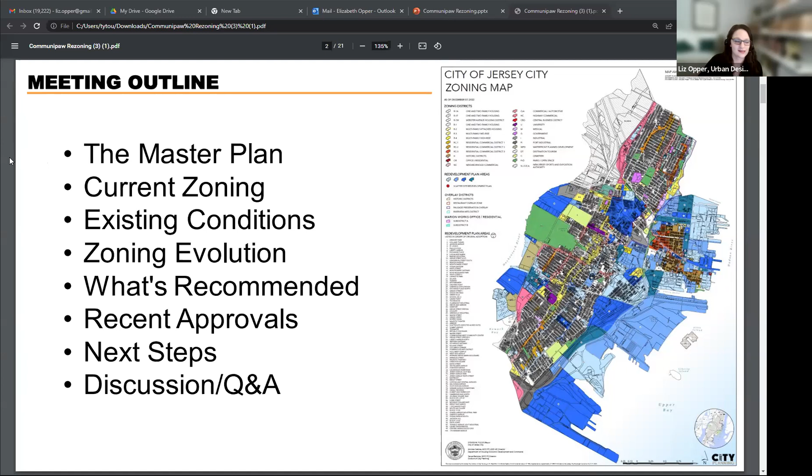So we recently adopted an update to our master plan. The land use element was one of the elements updated in this effort, which provided many zoning recommendations. City planning is studying these recommendations and will be bringing them to the planning board in different groups or phases. Phase 1 was focused on corrective zoning. You may have attended some of those previous meetings, and the efforts of phase 1 were adopted in September 2022.

Something you might be familiar with, as there's an RC1 on Mallory Ave, was looking at some of these RC districts. Phase 2 of our effort, which is what we're doing now, will focus on recommendations to the R1 and other low-rise residential zones. So right now we're in phase 2 of our efforts with the master plan.

A master plan is made up of many elements. I've already mentioned the land use element. Other elements include open space, housing, circulation, and others. Each of these elements had their own recommendations. As part of our recent update, we reviewed all of the master plan elements and identified common goals between the elements. Those goals were then framed as lenses: connectivity and mobility, economic opportunity, social equity, and climate resiliency, allowing the master plan vision document to synthesize overarching goals and recommendations and put something more cohesive and clear forward. So all of these things are connected and tied together and shape each other.

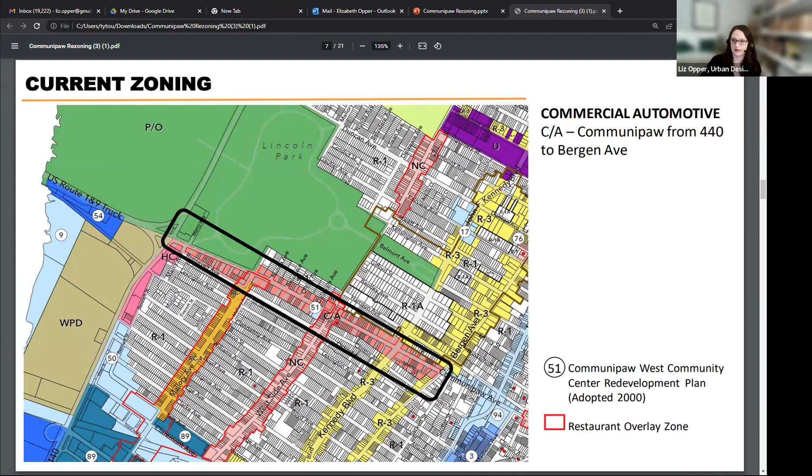Today we're specifically focusing on the area of Communipaw between Mallory and Bergen Avenue. We're recommending that we look at this area for rezoning, and that the western portion from 440 to Mallory Avenue would be better suited for redevelopment. There's a majority landowner there. There are other small home property owners as well, but it is one majority owner.

This way we can look at the lot at the block as a comprehensive vision. These lots are also through lots, meaning they have 2 front yards. And the lot depths are not typical—a lot of those lot depths are less than 100. So the conversation today is going to focus on Communipaw Avenue between Mallory and Bergen.

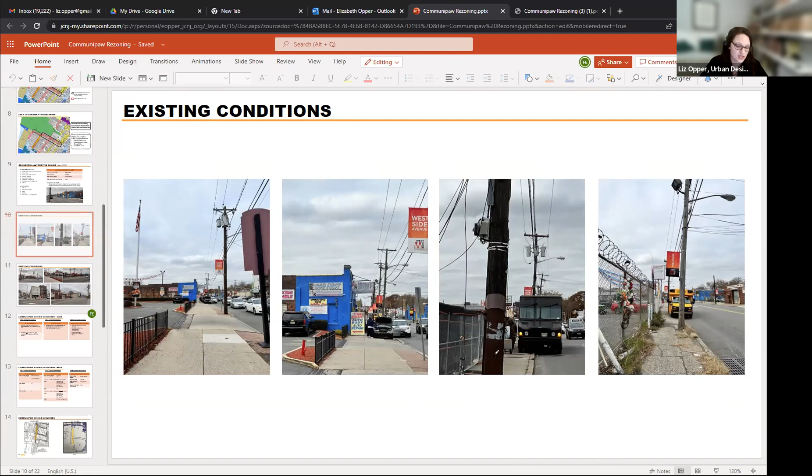There are a lot of vehicles that mount the sidewalks, some of which are there for extended periods of time while they're being serviced. It can be difficult and unpleasant to walk here, and given the proximity to the park and Westside Avenue shopping, this area should be much more walkable.

Just wanted to share some additional images highlighting the various uses along this corridor. You'll see drive-through restaurants, apartment buildings with ground floor commercial, and some different auto uses, which we've already discussed. So now I'll pass it over to Francisco, who will walk us through the evolution of the zoning.

With the Communipaw zoning evolution, this is specifically about uses. Prior to the 1957 zoning, warehouses and industrial uses were the primary uses on this stretch of Communipaw, and you can see that industrial history when walking the avenue today. Moving to 1957 zoning regulations, this was the business district B zone, which permitted retail businesses of any kind, apartment houses, and limited commercial uses. It did prohibit any manufacturing or light industrial, gas filling stations, and public garages.

Moving forward to the 1974 zoning regulation, this was zoned as a C2 office retail, mainly permitting office, retail, garden and mid-rise apartments, auto service stations, auto sales, as well as parking, garages, and lots. Then moving forward into 2000 with the master plan, it described this area as a community commercial space and commercial automotive area.

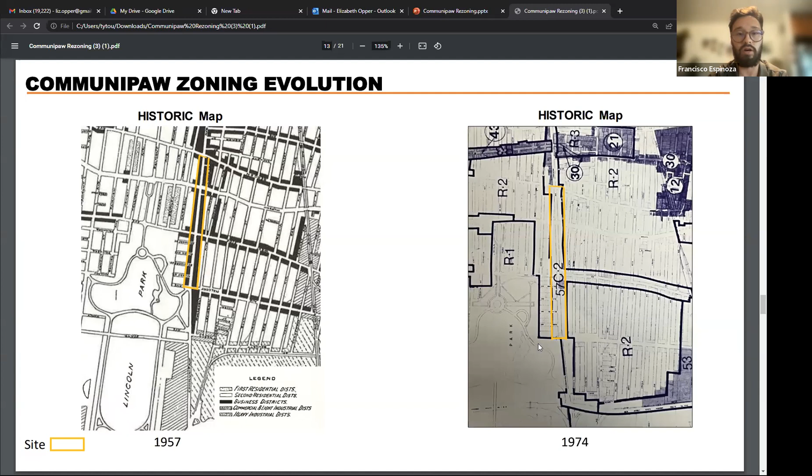These two photos are historic map photos. On your left, highlighted in this orange-yellowish color, is the zone we're talking about, the stretch from Mallory to Bergen. In 1957, it was zoned for a business district, and then in 1974 it was rezoned to include the C2. Okay, so we're going to jump into what's recommended for this area.

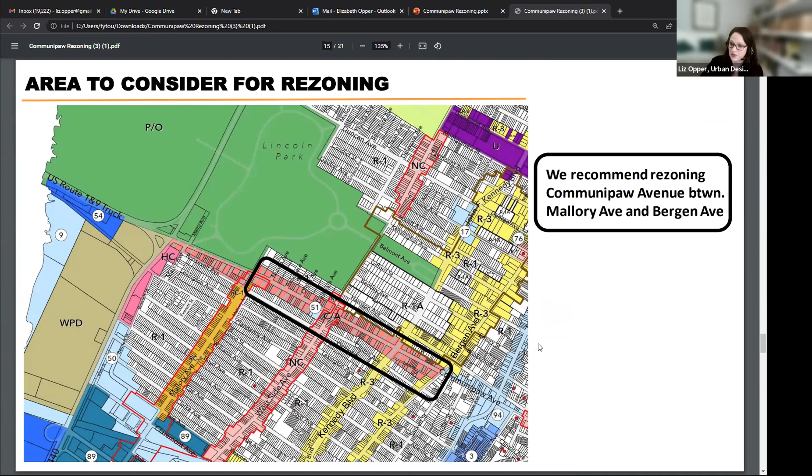These recommendations come from the master plan land use element. We're recommending rezoning Communipaw Avenue between Mallory and Bergen. The land use element recommends two different things for this area. You can see on the bottom right some area highlighted in orange and some in pink. In orange is what the land use team was recommending we zone NC, neighborhood commercial.

This is an existing zone in the city, and we would simply bring that zoning to this area. In the NC zoning, many uses are permitted. It's very pedestrian oriented, with commercial and retail to support the surrounding neighborhood, and a maximum height of 5 stories.

Going west between Mallory and West Side, the master plan was looking at this area as gateway commercial. You might have heard that term - that might be some of the verbiage that brought you here tonight. This was a new zone recommended by the land use team, and we'll get into more details on how we're interpreting that moving forward.

The recommendations with the gateway commercial are pretty in line with some of the neighborhood commercial objectives - improving the pedestrian realm, lessening some nuisance impacts like cars on the sidewalks, for example, reducing drive-in commercial activities in favor of uses oriented to the street, and looking at a 5 or 6 story development.

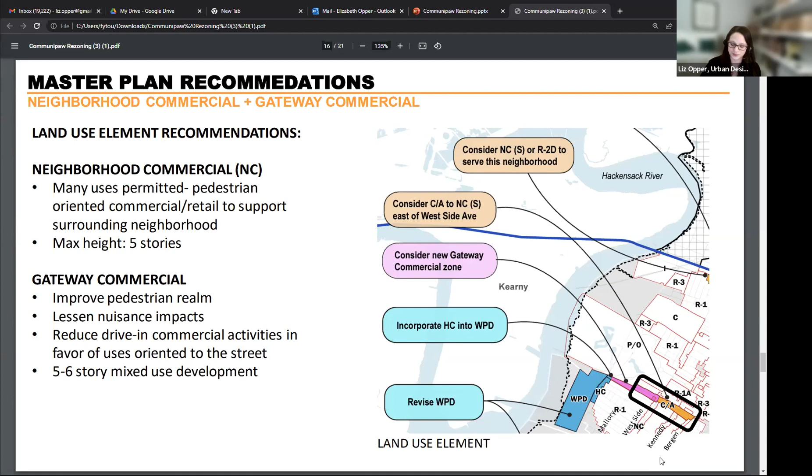So to get into the NC zoning for the area between West Side and Bergen, the master plan recommended exploring different scales of NC. This area we're recommending to keep at the current scale of NC - we're going to call that NC1. As we said, many uses are permitted.

You'll have access to this link following the presentation. Some areas with NC zoning currently near this area that you may be familiar with are the Junction, portions of West Side Avenue, and McGinley Square. Again, many uses are permitted, nothing industrial, ground floor commercial, and residential uses above. Max height of 5 stories, a rear yard of 15% of the lot depth - much larger than the commercial automotive permits require.

The approach to parking is to limit the amount of curb cuts - being very strategic in where curb cuts are located and how large they are. We're looking at some parking standards used in a few different areas with NC zoning, either 0.2 or 0.3 spaces per bedroom, which can be determined based on geography. There's currently a precedent for different parking requirements based on where you are in the city, so we can work with you to see what the need may be there.

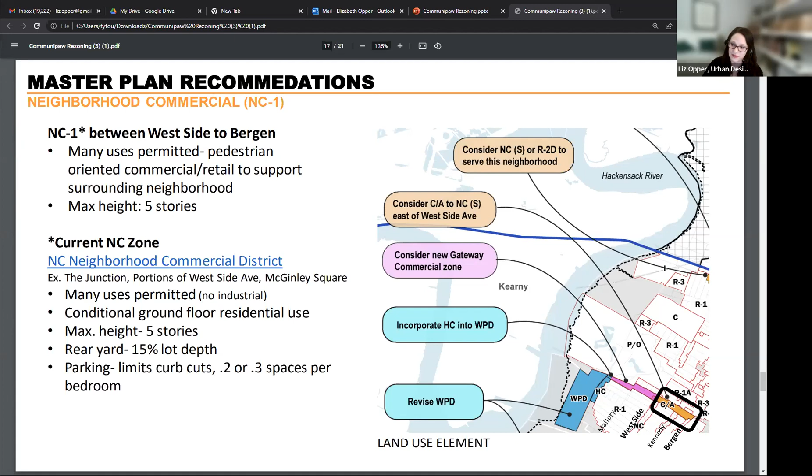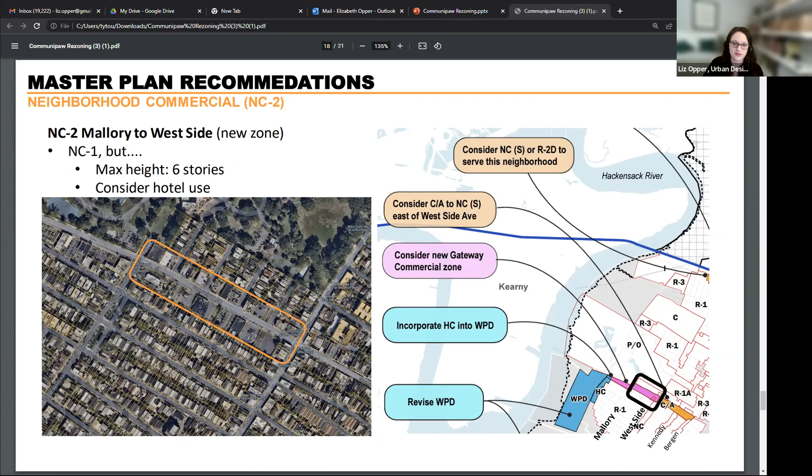For the area slightly further west between Mallory and West Side, we're interpreting that this new gateway commercial zone would essentially be an NC zone, like the NC we just discussed, but a little bit taller. Right now the master plan recommends this area can go up to 6 stories, and we could also consider some additional uses, perhaps a hotel use.

And I'll pass that over to you, Francisco. Sure, so what has recently been approved here? In this slide, this is a bird's eye view of the area - just to get everyone oriented, on your left is West Side Avenue near the Checkers, and on your right is Mallory near the McDonald's on Communipaw.

So now this aligns with what the NC2 would allow, and we just wanted to show everyone a visual of what the future buildings could possibly look like on Communipaw with this type of zone in terms of height. It's the same segment of Communipaw we just discussed, this NC2 space spanning between Mallory and West Side.

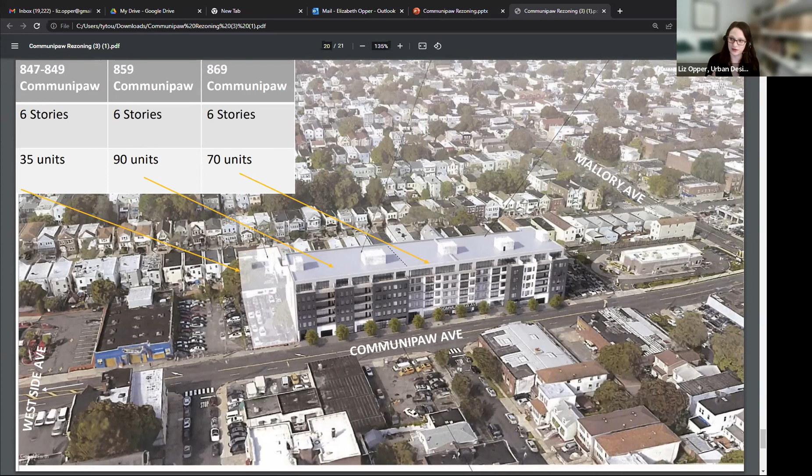Okay, so that's our introduction and review for tonight. We are planning to share a draft with everybody and the rest of the larger community, probably sometime in February, with this language. We'll publish it. We have all of your emails now as you've attended this meeting, and we'll give everybody some time to review. If there's a lot of questions and it looks like there's interest in a second meeting, we'll host a second meeting.

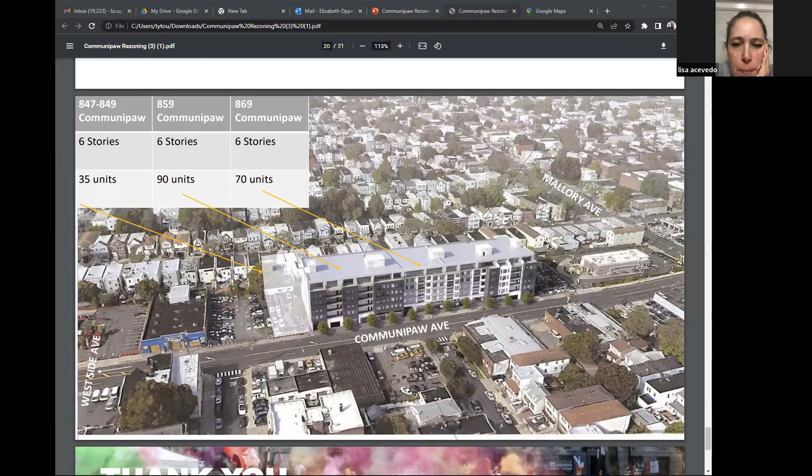I agree completely with what Colin said about the minimum setback, and we have an opportunity right now to get this right. Whatever we do is going to be in place for decades. If we miss that opportunity, like we did further down on Communipaw where we have buildings built right up against the street, we forever lose the chance for wider sidewalks, more greenery, and bike lanes. I just want to reiterate that.

Also, about traffic, while in theory there were two lanes each direction, there's never... I used to make a habit of reporting all the cars parked during rush hour, and I just gave up on it because it never gets enforced. I find it disheartening when people in one department, when these things are raised, say that's not our purview, because they're so intrinsically linked. We have a tremendous opportunity now as it's redeveloped to get it right and change behaviors through enforcement, because these things never get enforced, and behaviors won't change without it.